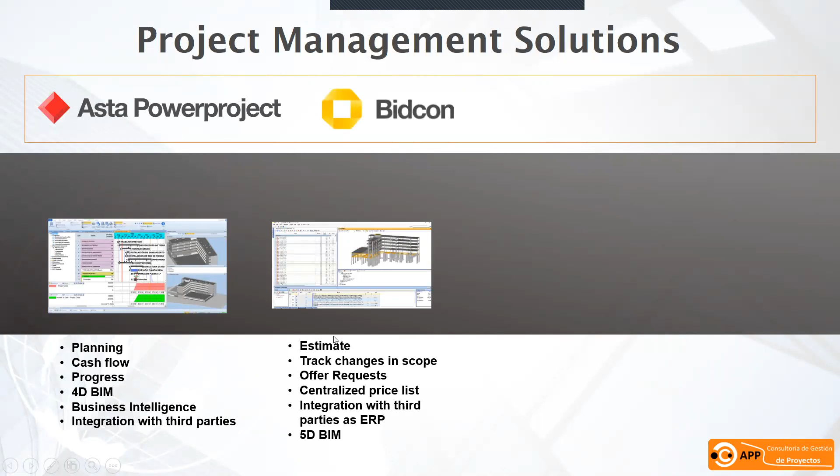Bidcon is mainly for 5D cost estimation. Tilos is a Trimble product for linear planning, and Ecodomus is for facility management, 6D and 7D.

So, the general idea about BIM. Some of us call it building information model, or modeling, or management. Generally speaking, BIM would take hours to talk about, so I would like to give the general idea in a quick way. 3D is a pure design model, so you will be able to see only the 3D model of your project. 4D, which we are going to focus on today, is the model plus time, which means that you are combining your Gantt chart with the model.

5D is the same, model and time, but also with the cost estimation. 6D is all of the above, the model, time, cost, plus sustainability. And 7D is for facility management, the whole life cycle strategy and as-built handover.

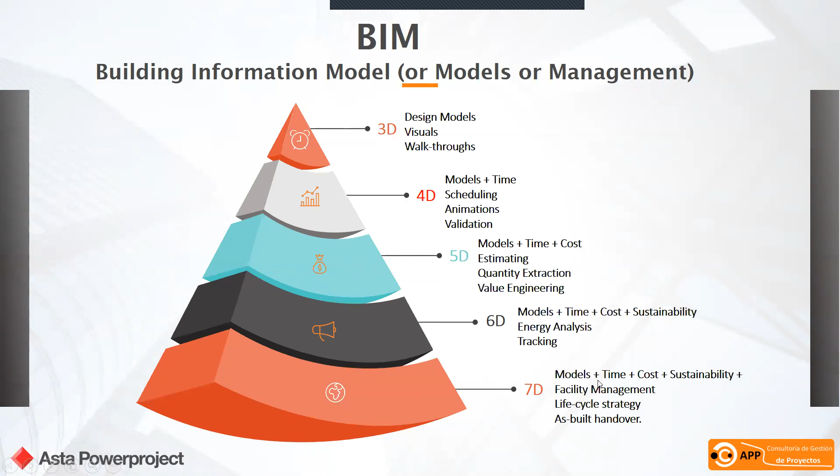So how can we actually produce the 4D BIM schedule? If you are using project management planning tools such as Primavera, MS Project or Asta Powerproject, you have your schedule, and you also have your 3D model, which can be produced by many other solutions on the market right now. Some of the famous ones are AutoCAD, Revit, and Bentley. Using the IFC format, you can combine the schedule with the model in Asta Powerproject. So Asta Powerproject plays a great role in combining your current schedule with your current model.

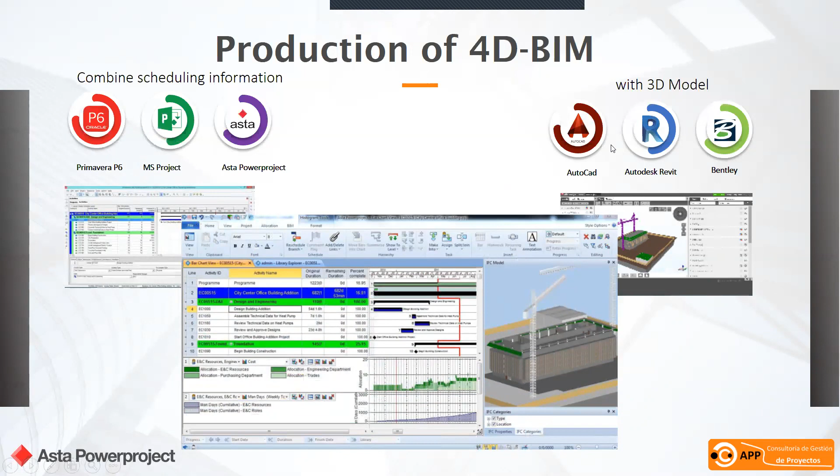Now, to recap, what is Asta and where does it come from? First of all, Asta has been on the market for more than 25 years now. It has been awarded four years in a row as the best project management planning product, and it's been used by 92% of the top UK construction companies. As far as I know, we have over 130,000 active users worldwide, and it is available in 10 languages. Some of the projects completed using Asta Powerproject include the London Eye in the UK, the Hong Kong Airport, Petronas Towers in Malaysia, the Warsaw Metro Line, and so on.

You may find some of the customers who are using Asta Powerproject. I will not be surprised if some of you are from these companies, but you might be in a different location. As a general explanation of the Asta Powerproject solution, first of all, it's a core scheduling tool. So you can have all the Gantt chart information and all the information regarding your tasks and so on. It's purely a scheduling tool. It has integration.

It has integrated modules or options such as the earned value analysis, the S-curves, the risk management, the line of balance. Previously, some years ago, it was an additional module, so you had to purchase it additionally. Right now, no need. It is integrated into the one Asta Powerproject. Business intelligence report as well.

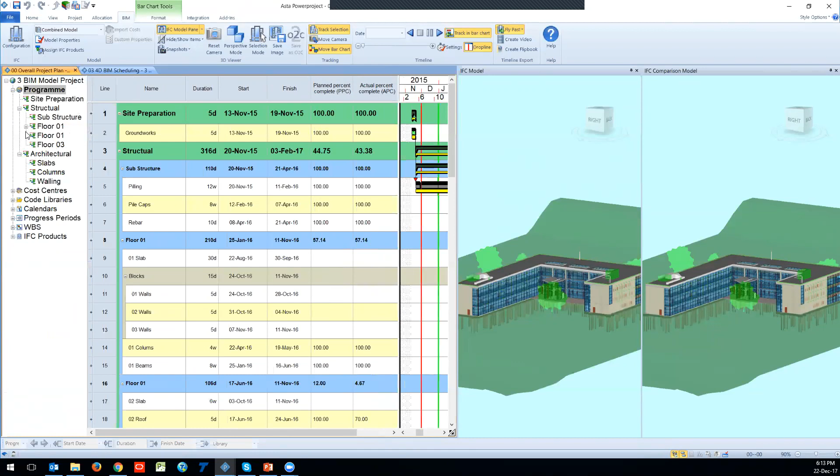We have our hierarchy, our project. This is a 3D model project. You can see the WBS structure on the left side. The spreadsheet information, so you have the spreadsheet with the standard columns. You can add any other columns. The Gantt chart. It's colorful, pretty well understandable, and you can change it.

These lines, which you can see with a different color, are our progress periods, which means my project has some progress information. So in Asta, you are able to have multiple progress periods in order to record your progress. At the end of each month, I have one progress period, and according to this, I have added the progress. Below the yellow line is my baseline information, okay?

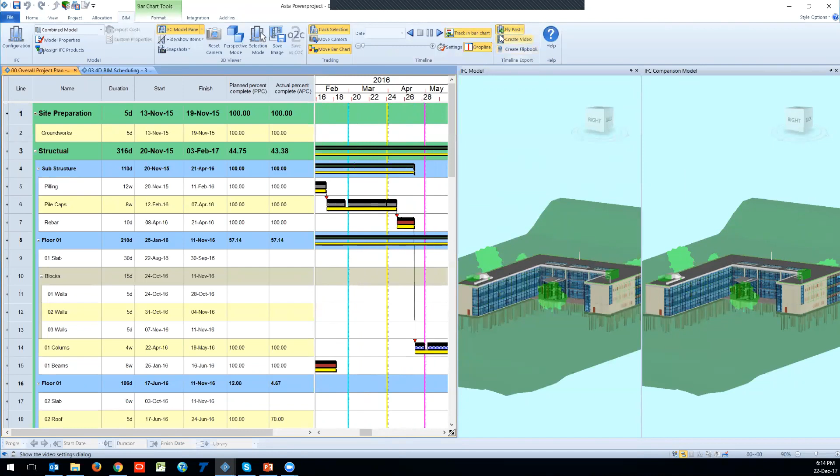So now on the right side, we have our model itself and the comparison model. As I have my baseline, I'm able to compare my baseline information with my model itself. So in general, when you run the simulation, you will see this view. This is my project result, so I have my standard Gantt and I have my model.

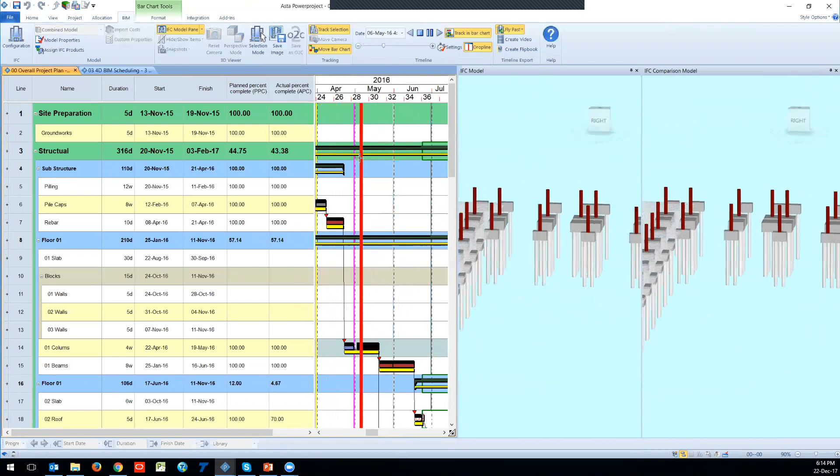And I have already entered my progress, and I have the comparison model in order to track my delays. So the next step, what I'm going to show is how to make this kind of plan, how we actually do it in Asta Powerproject. So I'll pause it and go to the initial stage.

When you first open Asta Powerproject, you will see this view where you have the Gantt chart, the spreadsheet, and your hierarchy. Well, first of all, let's bring in our model and see how we can create the scheduling directly from the model.

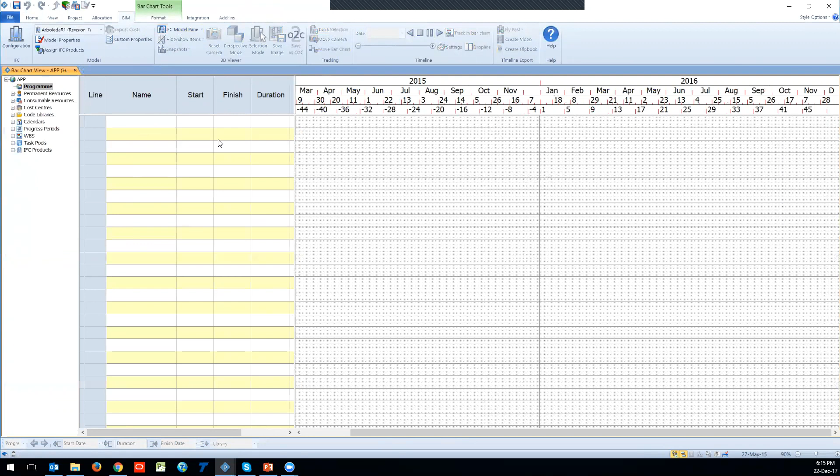There is an ability to import the model, so you can import it from your local drive or from the server, if you have access, or using the free Eleco BIM Cloud option. The BIM Cloud option is very useful in order to share your IFC files, so you can have the IFC files with different revisions.

If we're speaking about revisions, for example I have already imported one model and I have the revision. So from here I can select whether it is the latest revision or which revision, and I can give the name of it whenever I'm adding a new one. So I will open this model.

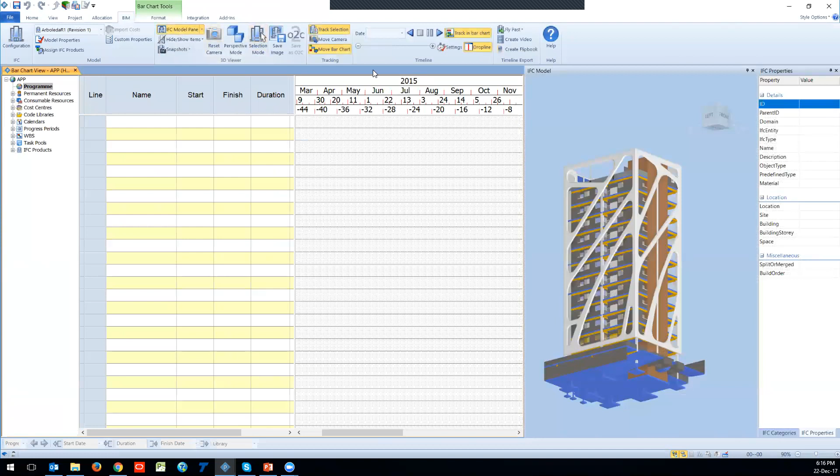As you can see, I have here one model. I'll just make it more visible. This is the hotel project, the sample hotel project. So what can we do with this model?

First of all, I have to say that Asta is not a design solution. It is a project planning solution with integration of the 3D model, which means I cannot move the objects, I cannot change the quantity, I cannot change anything in this model. However, I am able to do some minimal changes like the visual effect, such as changing the color of the objects. This is the minimal thing you can do in this case.

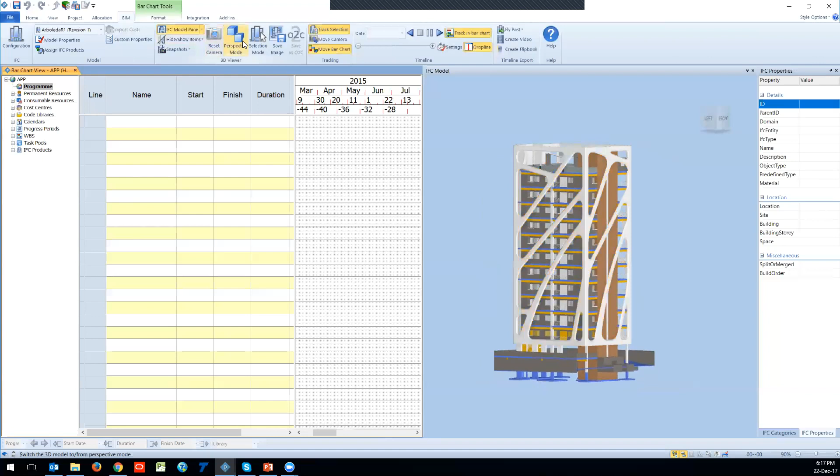Now what else can we do here? We have an option such as perspective mode, so you can go inside the building and have a walkthrough.

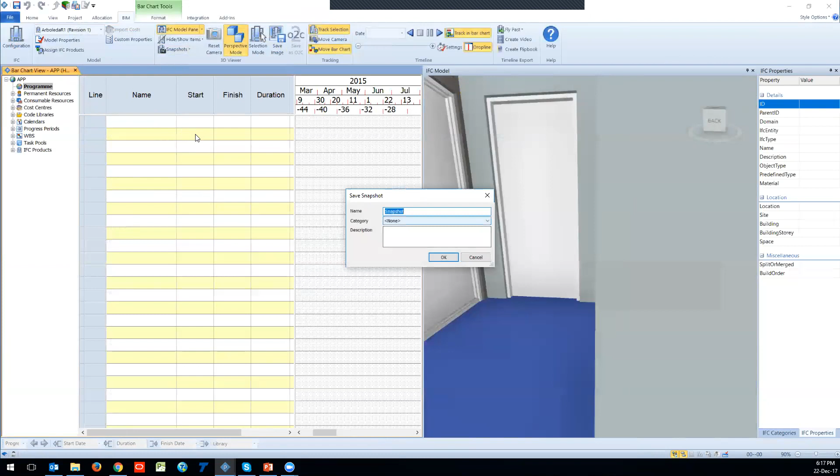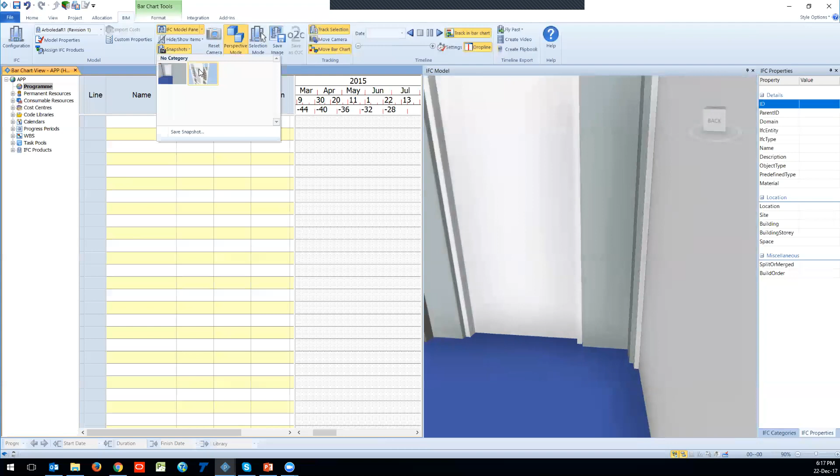You can also save snapshots. I will save one snapshot, let's say interior. I'll save this one, then go back and save another one - this is my exterior. So whenever I need to go back to this one, I can just select that particular snapshot and continue working on it. This is the perspective mode.

Another thing is I'm able to share the picture if I would like to send a picture of my 3D model, so I can save the picture in JPEG or any other different formats. No problem, you can save it and share with anybody.

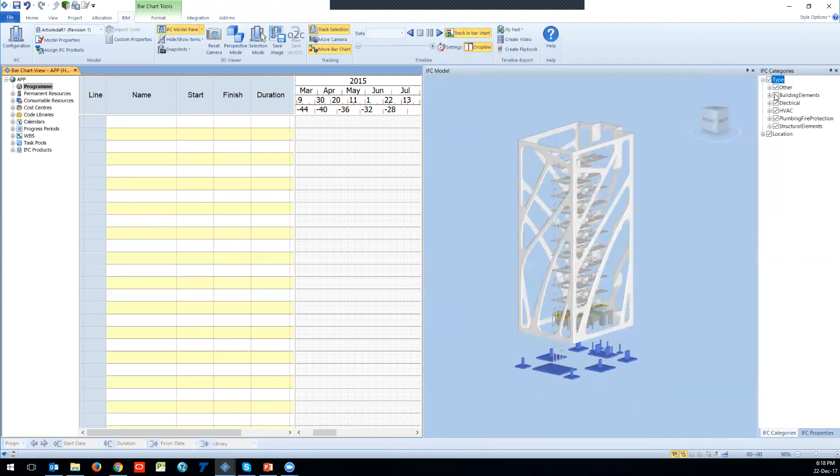Now let's go into more details, such as the properties and the categories. Once we import our model, we will see information such as IFC category. We have different types of categories, so you can switch them on or off in order for better planning and controlling.

You have different parts of the location, so I'm just switching some of the parts of the location, for example. All of this is possible to do in Asta Powerproject. So this is IFC categories and so on.

Now if I select one object - right now I have selected the skin - and go to the properties, I'll make it more visible. Here we have information coming from the model itself. We have the ID, the parent ID, if not it will be empty. The important information is the IFC entity, which is already given in the model.

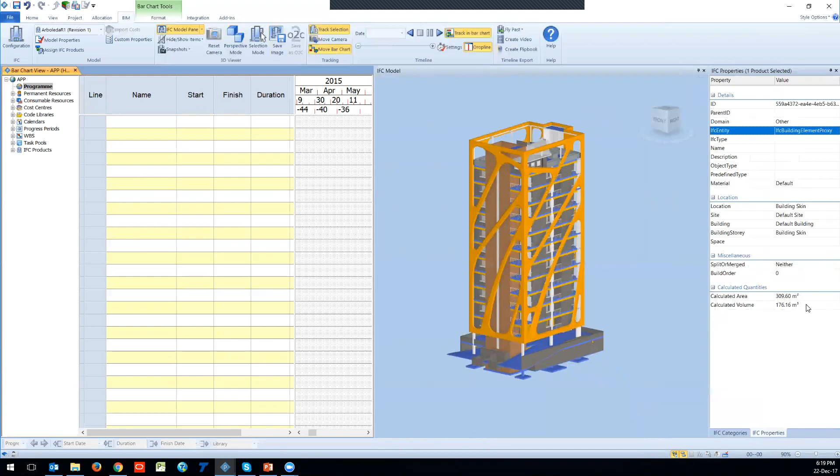The material used can be loaded and shown, however it depends how much you have loaded into your model previously. An important part is the quantities - you have the calculated area in square meters and the volume in cubic meters. So when you select an object, you get information about the calculated volume, area, width, length, and height of the object. In my case it's a wall, plus gross side areas. All this information is visible here.

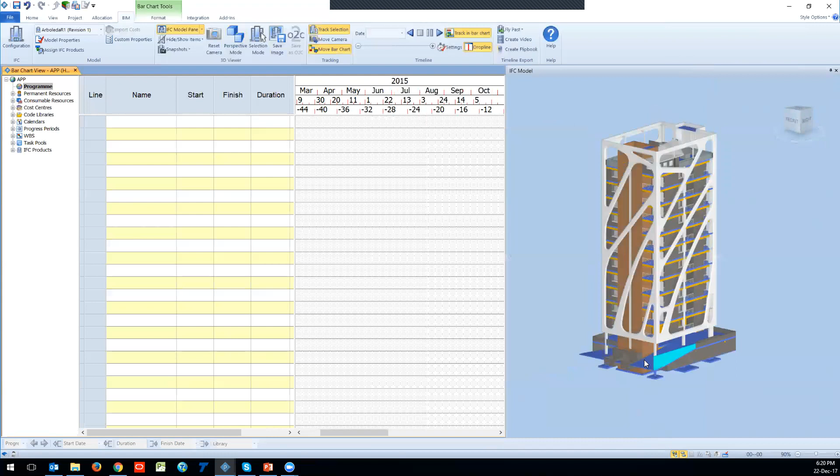Now, how can we create a schedule from this model? I will go and select my footings - so I have here my footings. There are multiple ways in order to create the schedule.

First of all, you can create directly on the Gantt chart - multiple tasks - and give the names. Then I'm selecting my selection mode and then select objects, and just easily drag and drop it onto the model. So now I have assigned 3 or 4 elements to this task.

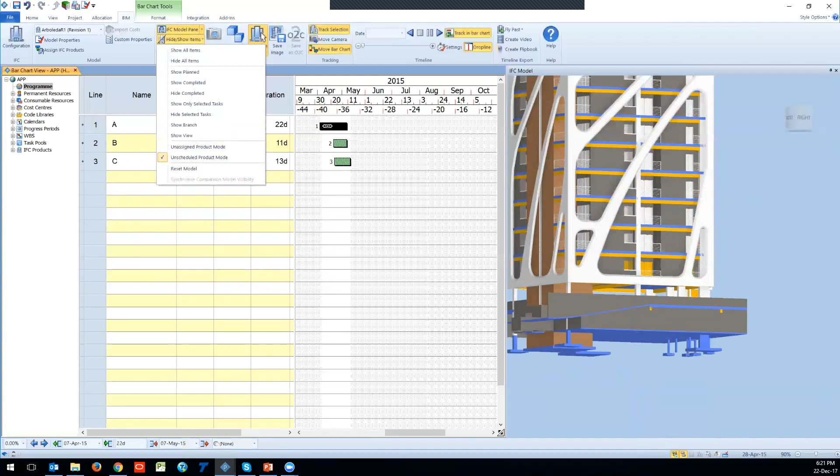So how can we actually benefit from this? Well, I can select the unscheduled mode option. It will show me the items which are not scheduled.

Let me show you once again. For example, I'm selecting this footing and this one, and I'm adding them to the task. Now it has disappeared. I can select multiple items, drag and drop, and they will disappear.

So this way it will eliminate planning mistakes. You will know which items have been planned and which items have not been planned.

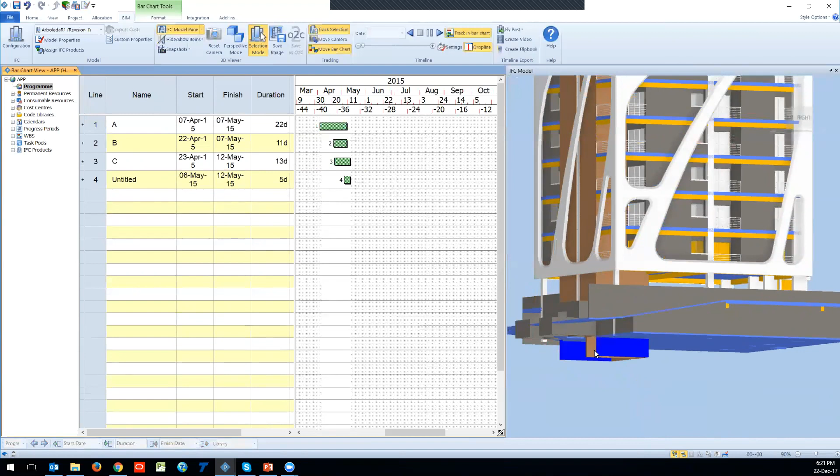I can select some of them and, without creating the activity first, directly drop them onto the Gantt chart, and it will create a task. I'll select a few more and drop them, and so on. So this is one way we can create tasks.

I'm going to delete this one, and you can see it's coming back.

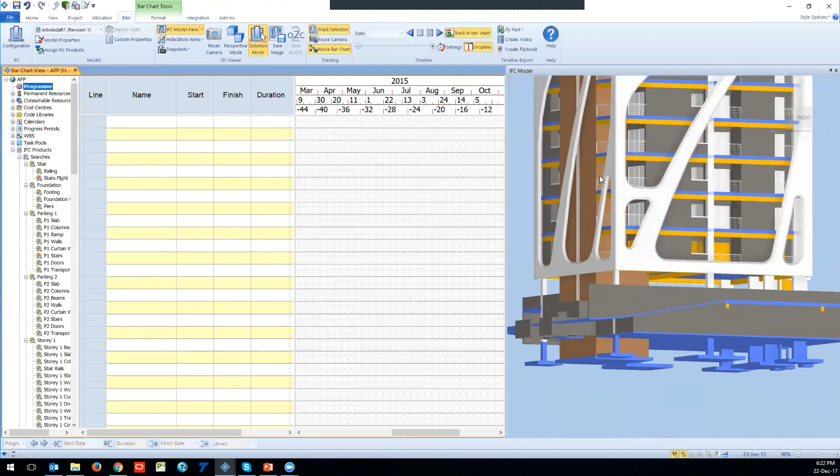Another thing is using searches. Searches are a kind of automation. I know you might have a lot of activities and a lot of elements in your project, so you can use searches. It's kind of automation for mapping your tasks with your model.

For example, I already have some searches created. I'm going to open the properties bar and explain how it works. We have the details information, so you can give the search a name. Now there is a criteria - in order to use searches in Asta Powerproject, you have to give the criteria.

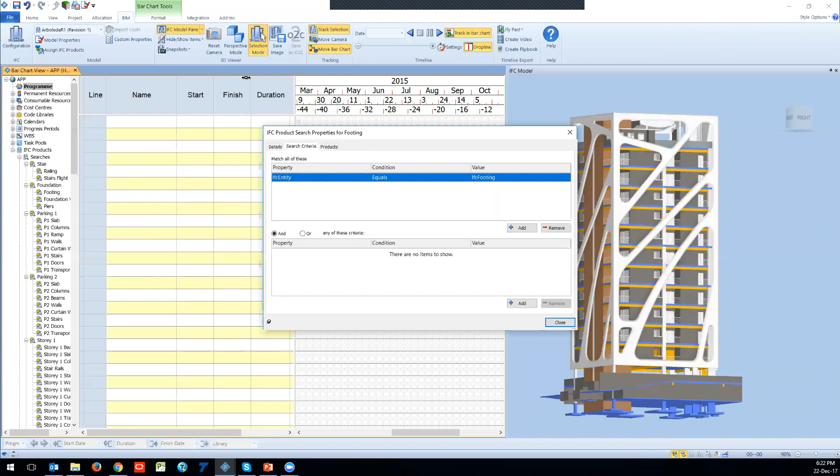For example, I'm using the property IfcEntity. If I open the properties pane right here and select, for example, the footing, I have the IFC entity, say IFC footing. So I'm taking the property IFC entity equals, giving the condition value IFC footing. Once you create this criteria, it will show you all the products you have in the model.

You can easily select them all. So I just select them and drop it into your Gantt. Right now, as you can see, it has disappeared.

I have it here, so I can also show them all. Whenever I select my task, you'll be able to see which item in your model has been selected.

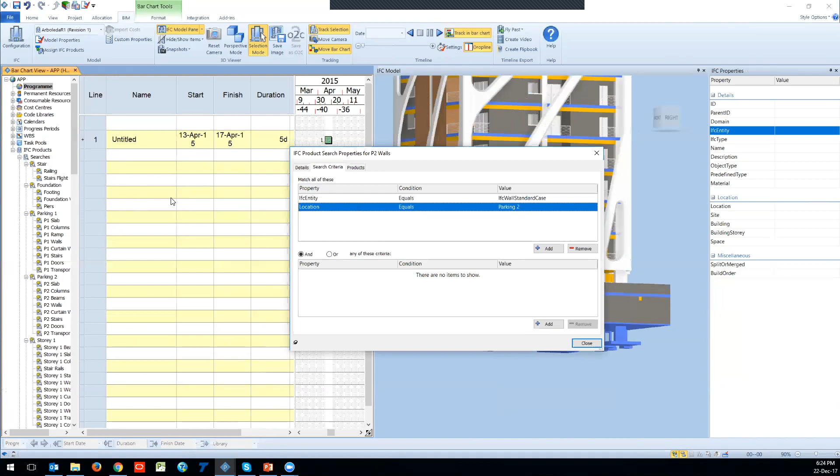For example, you can have multiple criteria. If I take the properties of the Parking 2, I have two searching criteria - first by the IFC entity, second by the location.

So I have my location, which equals - this is the wall. I'm looking for the wall, and I'm looking at which location it is - Parking 2. So if I select it, it selects my tasks.

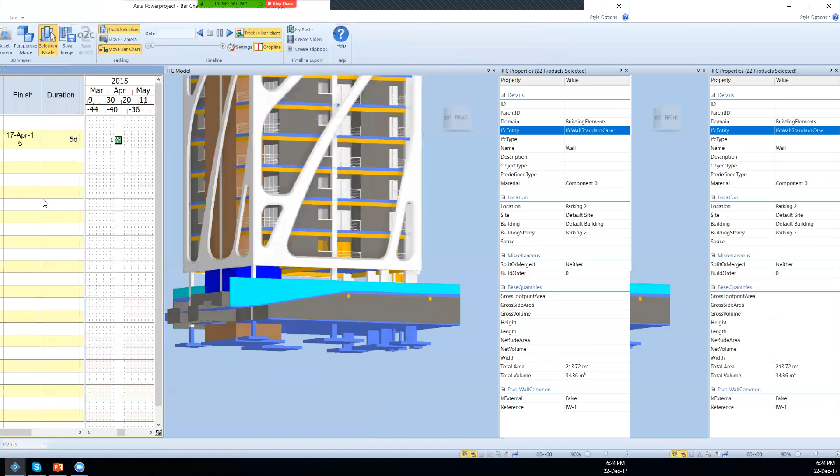Now once you've created it, you can easily create your task directly from your IFC search - no need to select from here and drag and drop. You can just create your task, and it appears over here as a foundation wall.

If, for instance, I would like to create a task for parking one slab, I can just create the task and I have my parking one slab.

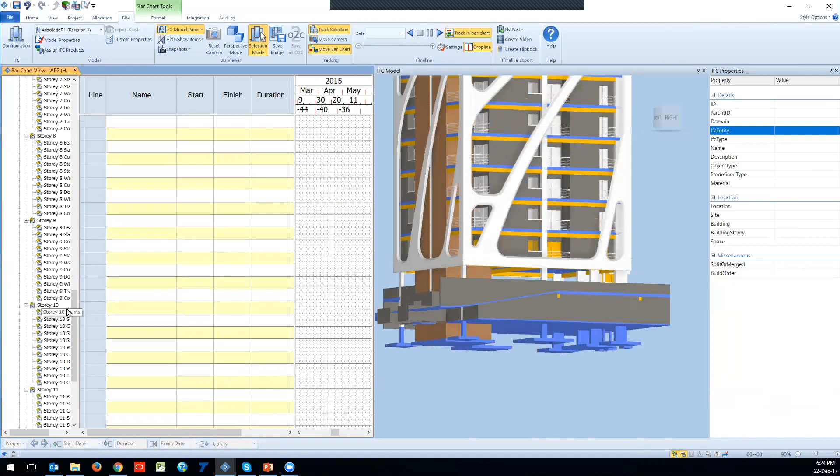Or once you have all the searches done, you can just select all of them and create your task. Now it's creating all the tasks which are assigned to my model.

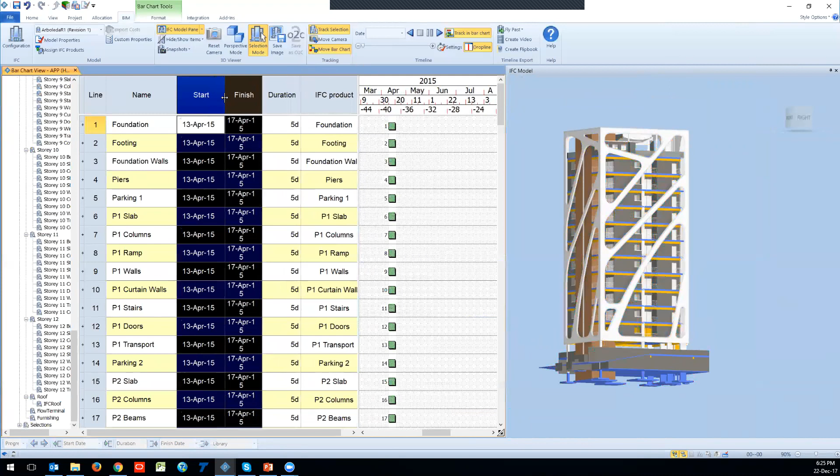Okay, it's done, so I'll make it more visible. Now, once I have it on my column as well, I know I have assigned my product in the column-based - this is the IFC product. It means it's showing which product you've assigned in your task as well as in your columns.

Once we've done this, what we can do is easily link it. So I'll select them all, link it as finish to start, and then reschedule it.

Now I have rescheduled. It takes the standard template default information regarding the creating activity. When you are creating the activity, it comes with 5 days. However, you can change it anytime, no problem with it.

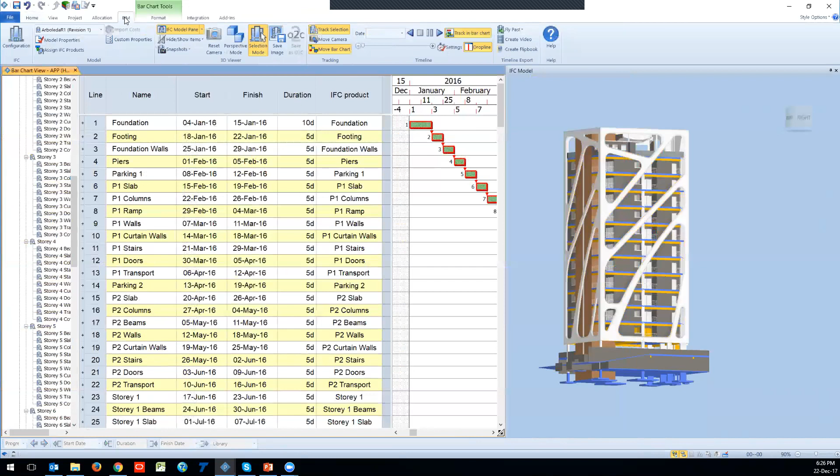Reschedule again. Okay, once we created this one, I can run my 4D timeline in order to check whether everything is correct, whether my timeline is going well, if I have any planning mistakes or not. So by this way you can visualize your plan in Asta Powerproject.

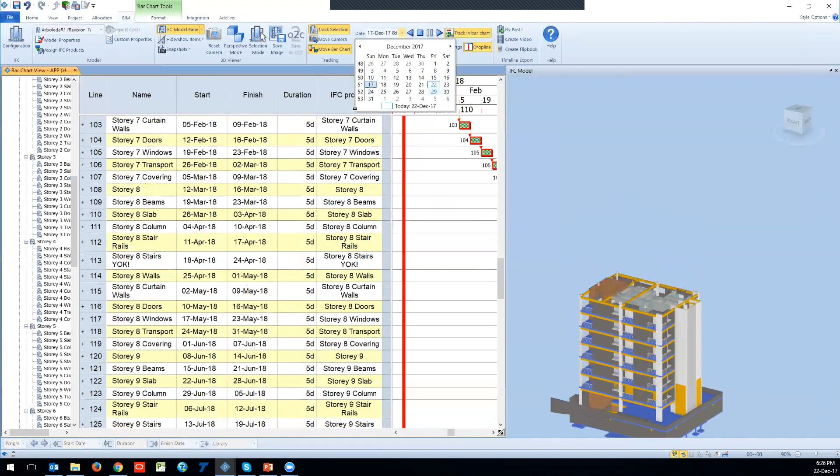So while it's going, the timeline options can provide you the information that you are able to track according to the date, or you would like, for example, to see the weekly progress. You can change it to see what will be my estimation, so you can change your dates in order to see in exact date and time which activity is going to be performed and track it on the model itself.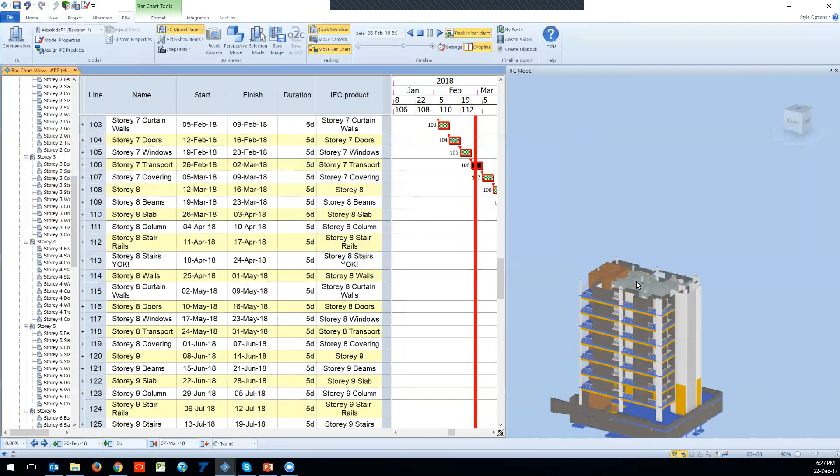Great, now I will stop this one. I'm going to show why we call Powerproject for controlling as well, not only just scheduling but for controlling as well. I'll show in a different example how we can do this, but just to make my schedule more or less better view.

So for example, I don't have here my WBS structure. So what I can do is just change this task to my summary task, and I know that the 3 tasks - footing, foundation walls, piers - go under my foundation. So right now, I have my foundation as my WBS.

So it works in a different way than the other solutions. You can create your work breakdown structure anytime. So in the hierarchy, my foundation task appears.

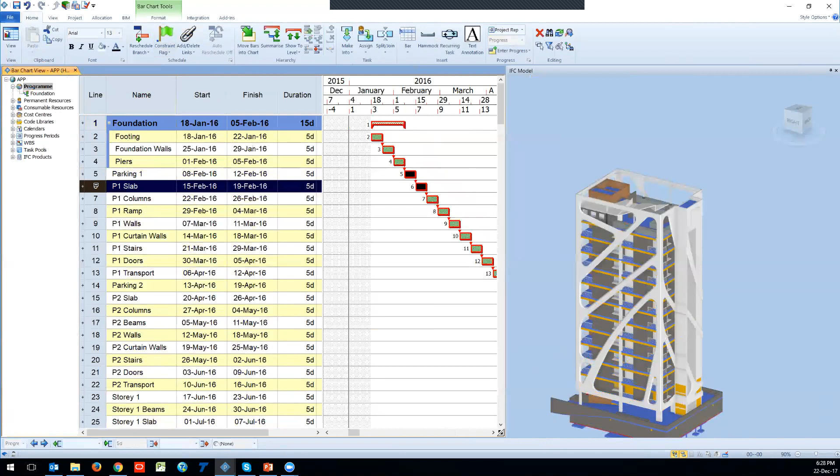The same way, for example, I have my parking one. I would like to make this one as a summary, or I can just select some number of the tasks. As you can see in my 3D model, it's also been selected. I can just summarize it. I can say this is the parking one.

I can remove this task because I don't need it. Now, I don't have any relation. In this case, I can do the relation - just finish to start - or the Powerproject allows making the relation between the WBS.

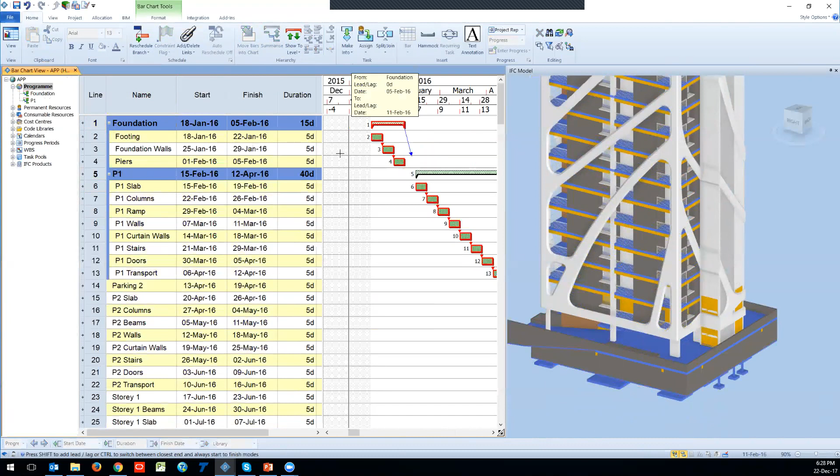So as you can see, I'm going to link my tasks between 2 WBS. By this way, you'll be able to see in this case it is appearing in the hierarchy. You can work on it.

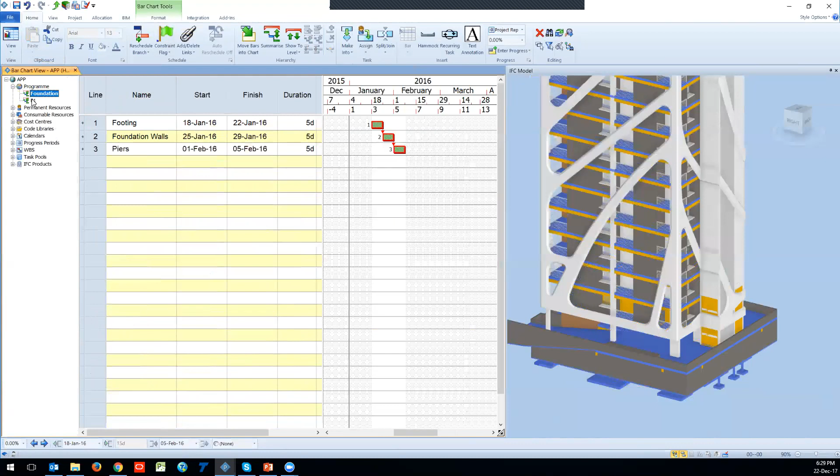For example, if you already have the hierarchy of your project, once you open it or import it in Asta Powerproject, you'll have the same hierarchy. And once your model is linked with your task, you can see only the view.

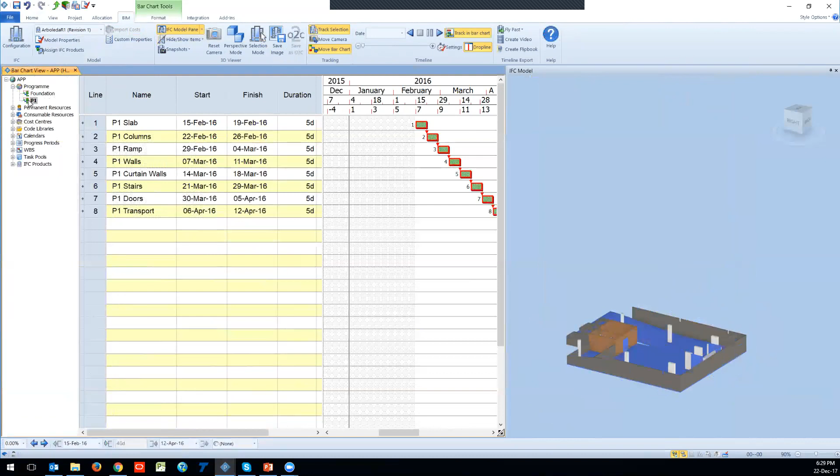For example, you are right now working with the parking one WBS, so you can see only the elements which are in the parking one. Great, so I'm going to show all.

And now another topic that I wanted to mention is how we can bring our current schedule. If we have our current schedule, how we can bring it. Well, we can simply open the project. So let me get to the project.

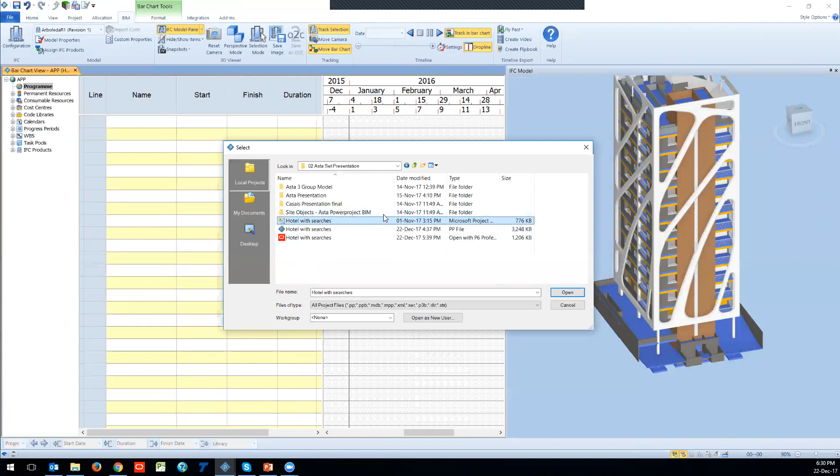Okay, so I'm going to open. I have here the Excel file or the MS project file. So first, let me open the MS project file. You don't need to do any additional effort for this - you are just opening the Microsoft project document.

So once you open it, it says that I would like to import using the template. And now I have my Microsoft project, the same way like I had in the Microsoft project.

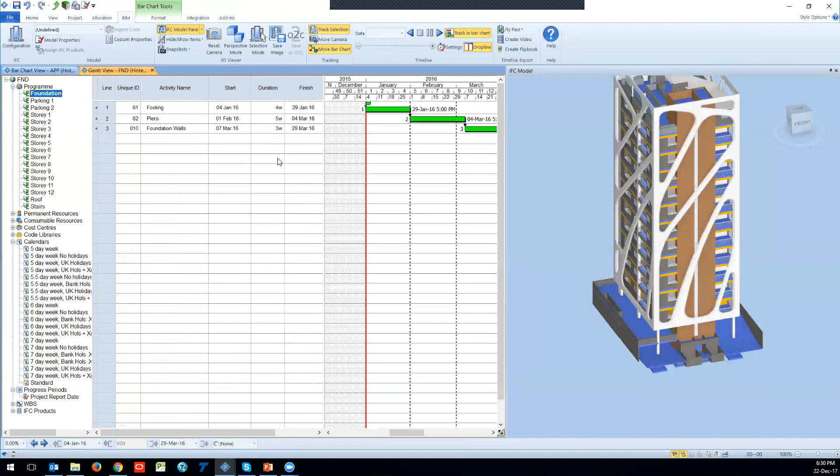So in this way, how I can do the linking, as I was explaining, you are going to the selection mode, selecting a particular activity, let's say in this way, and just drag and dropping and adding to your schedule. Okay, this is the way, or as I said, you can create the searches, which is kind of an automatic way.

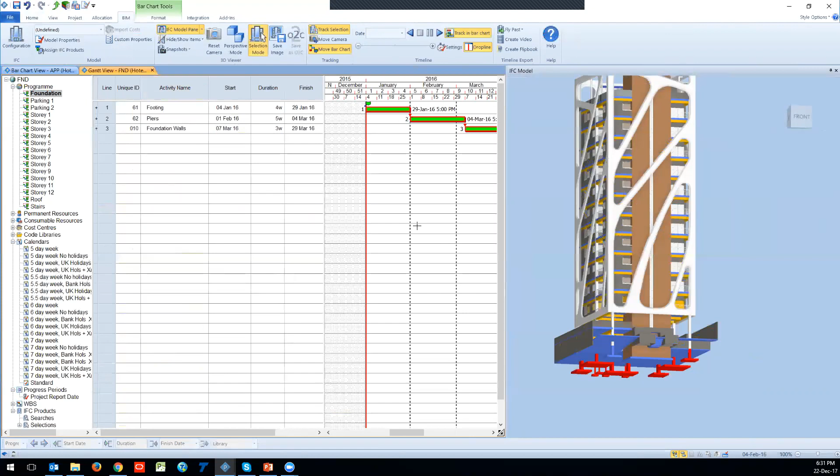Let me open another one, which is the XER file. So this is a Primavera XER file. The same way I'm going to use, for example, the Primavera template, which is already inbuilt. And you can see I have the same project, but which was in Primavera, right now in Asta Powerproject.

So in the same way, you can use the searches or the IFC drag and drop file selection in order to link your project and the model together.

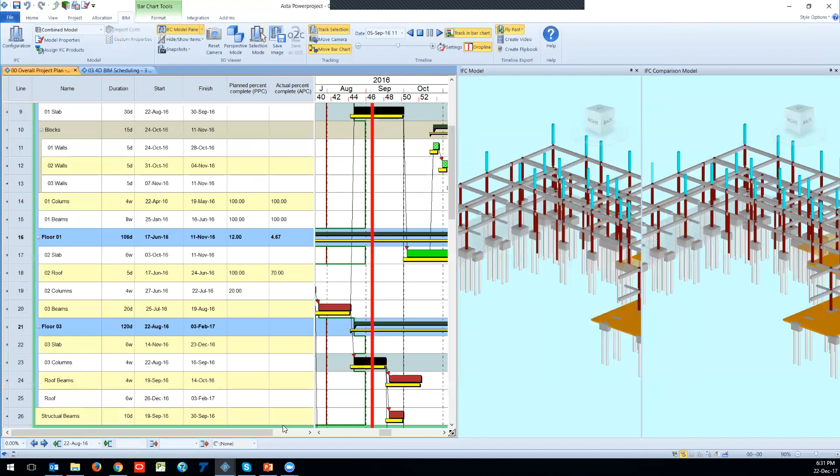Okay, now I'm going back to the university model. So once we have created, updated, or entered our progress, what we can do, or before entering the progress, let's go through the views. Asta Powerproject allows you to have multiple views. So what is a view? It's actually a saved set of columns which you would like to see. For example, I have here multiple views, like the overall plan.

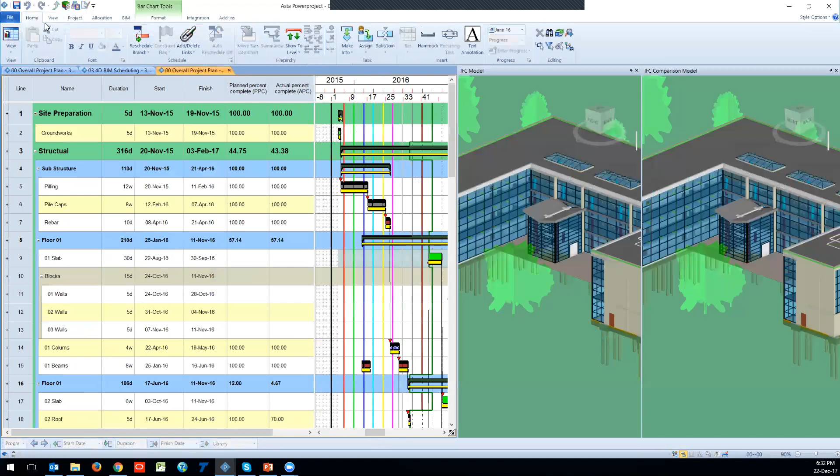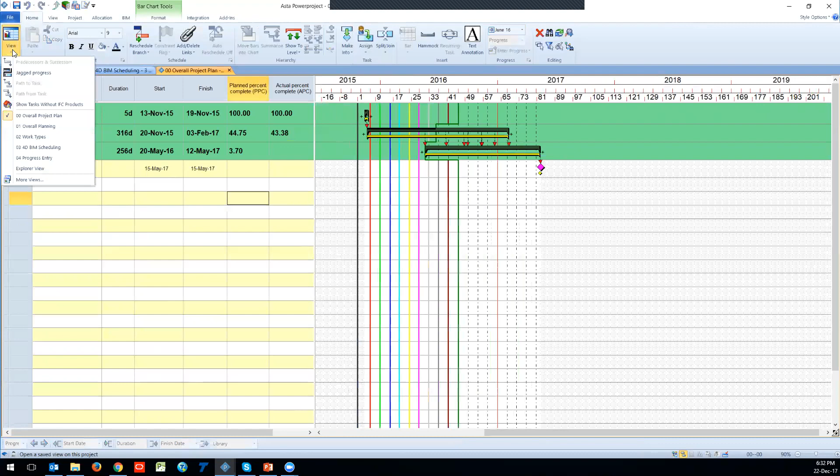If I'm going to see the overall plan, I'll have information such as the main information, the planned percent complete and the actual percent complete. I don't need to see, for example, the model view, so I can remove it. The other view is the overall planning. The overall planning view is where you are able to input your quantity to set up the work rate, the unit time, and as well, when you are adding the progress, you will have the actual work rate and the work rate remaining.

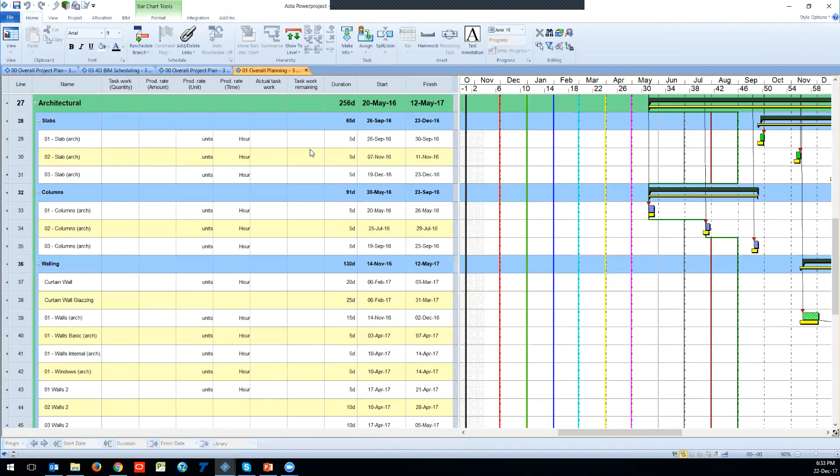So how can we do it in this case? Once we have the model, I'm going to show only the model itself. I will add here the columns. By the way, you are able to add as many columns as you want, like information about earned value, constraints, cost and income information, resources, allocations, and as well the IFC. So I'm going to add here the IFC volume.

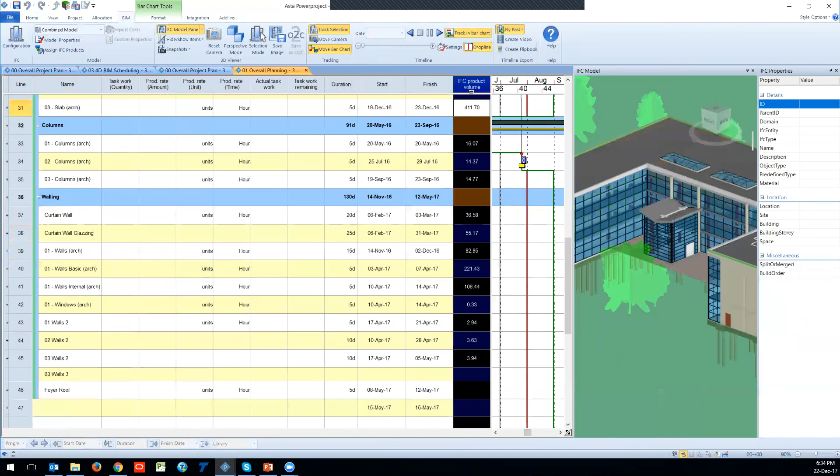IFC volume is the same as what I was explaining from the properties bar. From the properties bar, we have here IFC volume and IFC area. So when I select, you have the IFC volume of the particular element. In this case, it is the roof, part of the roof, and I know that it is 76 cubic meters. So, for example, I would like to use this quantity information in order to plan my work.

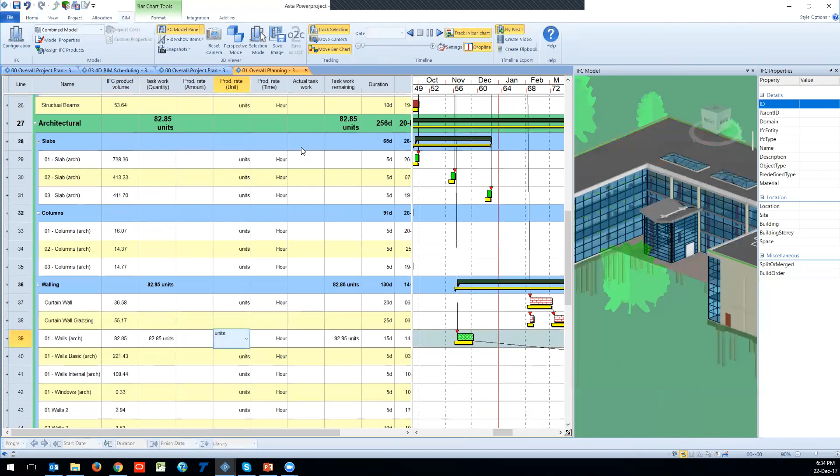So I have this task, which is the wall, and I have my information about the quantity. I can easily copy and paste it to my quantity. In this case, it's a unit, but if I add here the unit as cubic meters or square meters, I can change this one to cubic meters. It automatically changes, and I can give the estimated work rate based on hourly, daily, or weekly. It's up to you.

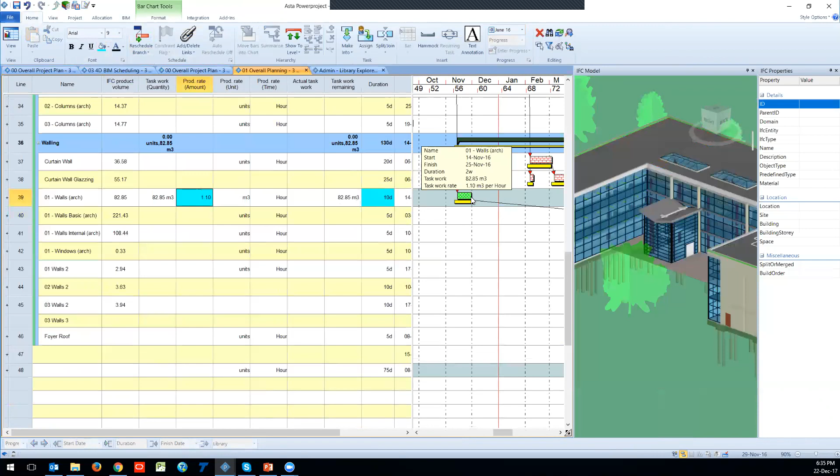So I'll say this is 10 hourly, and the duration of my task automatically changes. As you can see, I will change my work rate. Right now I have 1.10 cubic meters per hour, but if I change it to 20, my duration is changing. Of course, I have hours; I should have taken a longer activity. If I change the activity duration directly on the Gantt, it will change my work rate. So this way, you can get all the quantities from the model as IFC product volume into the quantity, give the production rate, and you will have your estimated duration.

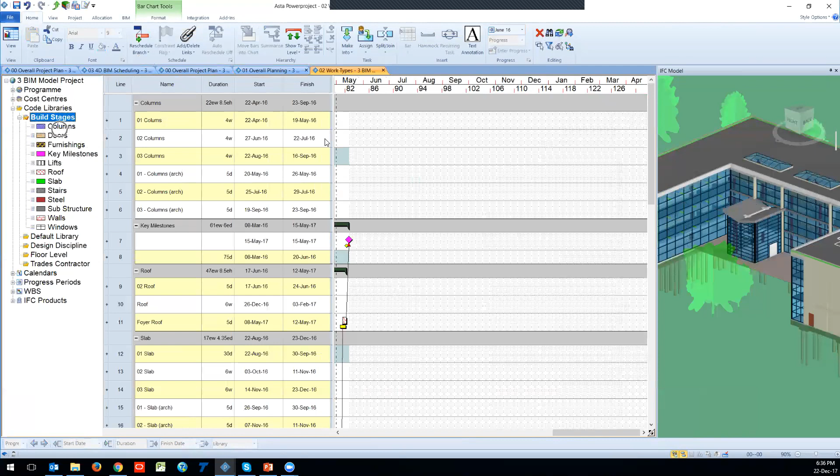Okay, great. Let me go back to the views. Once we have our overall planning, we have the work types. What are work types? In Asta Powerproject there is something like a code library. You can create your own libraries in order to monitor which floor level you are working on or the building stage. In my case, I have divided it into columns, doors, furnishing, key milestones, and so on. They are very visual in our Gantt chart, so I'm able to see all the information according to my code library. For example, all the roofs, I can see when my activities are, and so on.

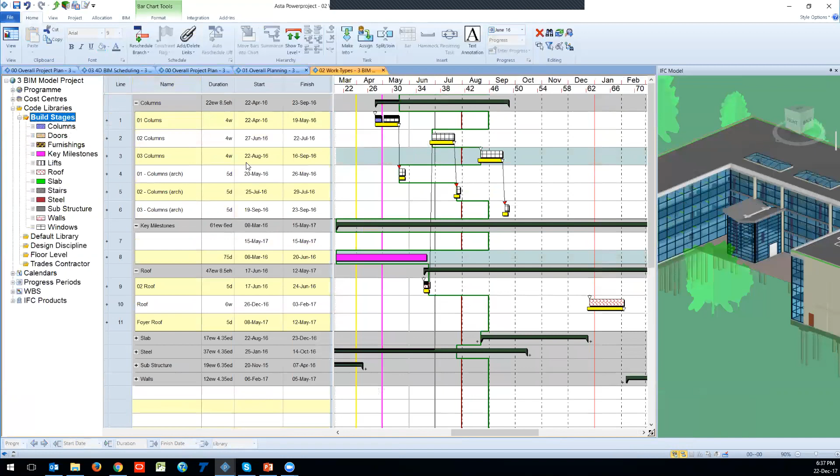This can be applied to your subcontractors. If you are using different subcontractors, you can assign the walls. For example, I would like to assign to this task, well, it will not be logical, but let me take the window. So whenever I change it, you'll be able to see it. Now, another important view is for BIM scheduling.

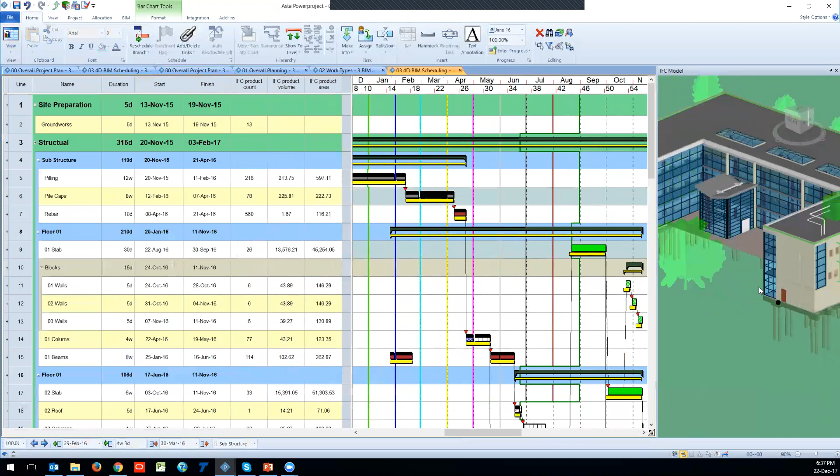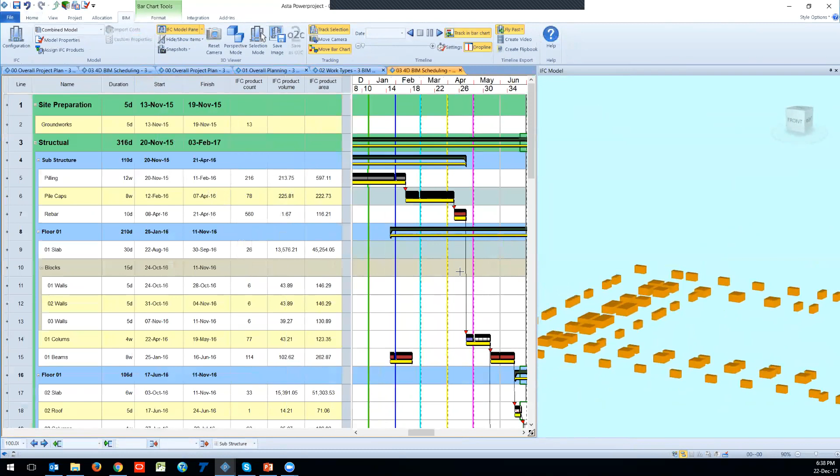It is the same as I was explaining. You have the information about the product, IFC product area, the volume, and the count. For example, if I select the task and I would like to see this task on my model, I can just show only the selected task. So I have my pile caps, and I know that I have 78 pile caps in this project. So this is the way you can work.

For example, I can also see by the structure, like the structural view, and show only the view, so I am able to see the structural view only. Okay, so going back to our views, there is a progress entry. As I mentioned, you are able to add the progress by different progress periods. You don't need to have only one progress period all the time. You can save your project as a baseline and then add different progress periods.

In my case, I have added several progress periods monthly, and each progress period gives a different color so you can easily analyze when the progress has been made. By the way, you can use Site Progress mobile. I have here Site Progress, where you are able to send your project or part of your project, some tasks, to the site engineer, and he will be able to update it using the mobile phone or the tablet.

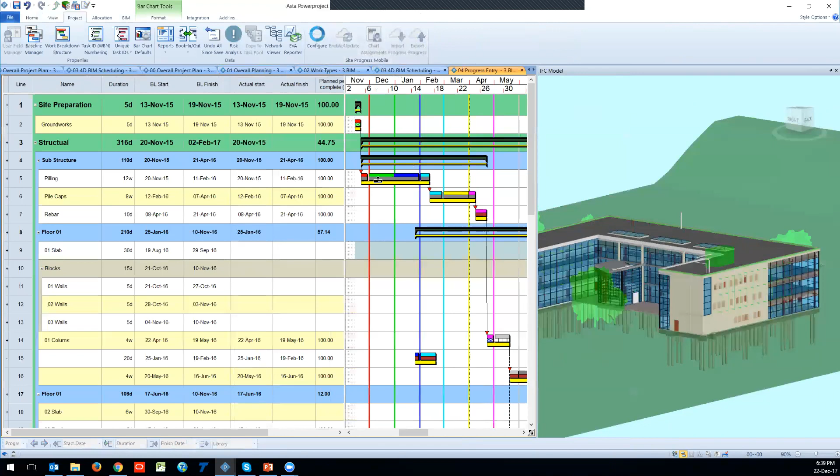This way, he sends it back to you with the progress information, and it will appear right over here. So you will have the baseline information, the actual start, the planned percent complete, and the percent complete as well. Okay, going back to the overall view and going back to the BIM part.

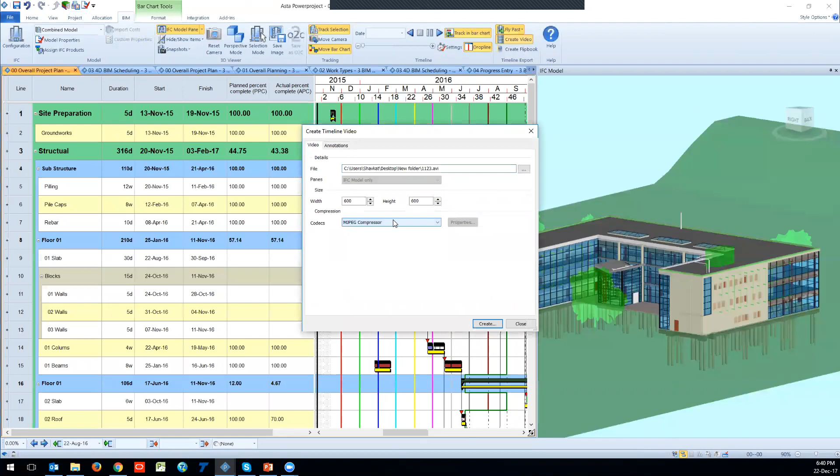There are functionalities such as creating video, so I'm able to create the video. I can add annotations like the task data, the week number, the information. I can set the widths and select codecs in order to create the video, I mean the simulation of it. I can create different fly paths. The fly path is actually the way you would like to see your project. If I select none and then run the project, it will be stable.

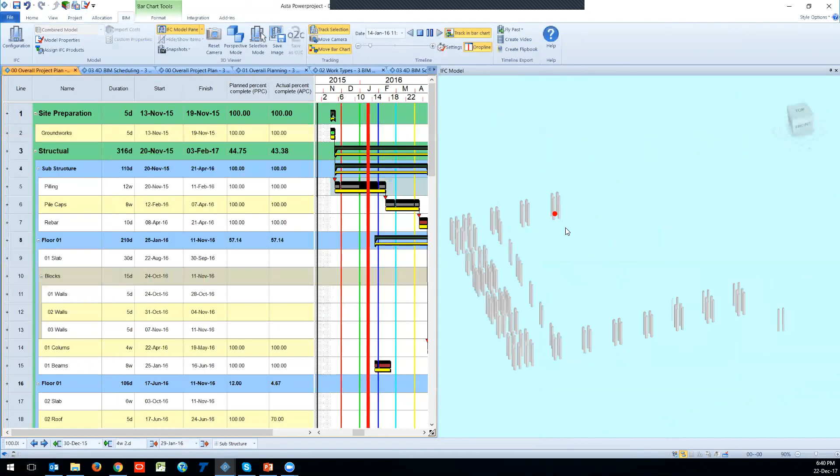However you would like to see it, you'll have the initial position of the camera. However, when you are using the fly past, it moves the camera according to your wish. It can be mapped to the task or to a particular date, moving to the other side. You can create a number of flipbooks.

What is a flipbook? A flipbook is, in other words, a pictorial demonstration. You can have a number of pictures. I can just create it and show you what I mean. The flipbook generates a number of pictures according to my simulation. Okay, it's generating right now. I'm going to open it.

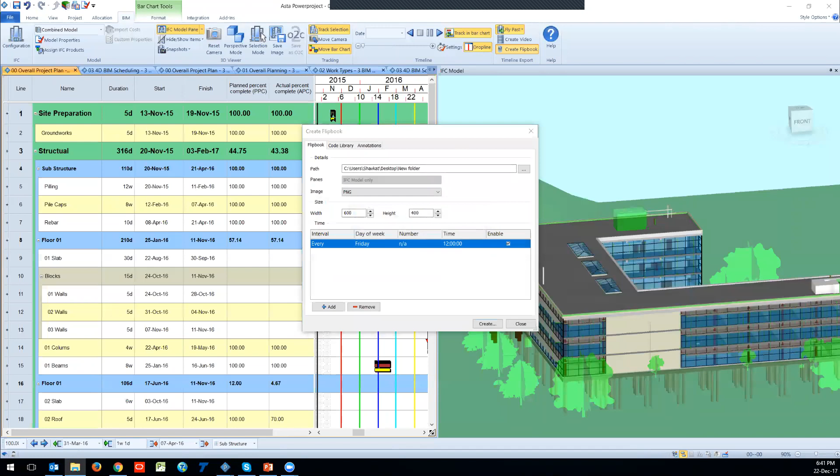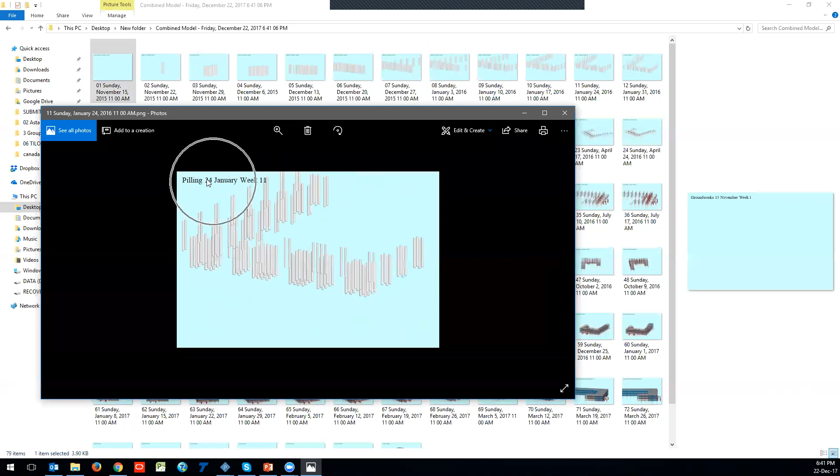Here I have my model, and I can see that each week I have some information about its status. If I open it and just move through it quickly, you'll have the information about the task, the current date, and so on. So this is the pictorial representation of the simulation. You might use this for reporting purposes.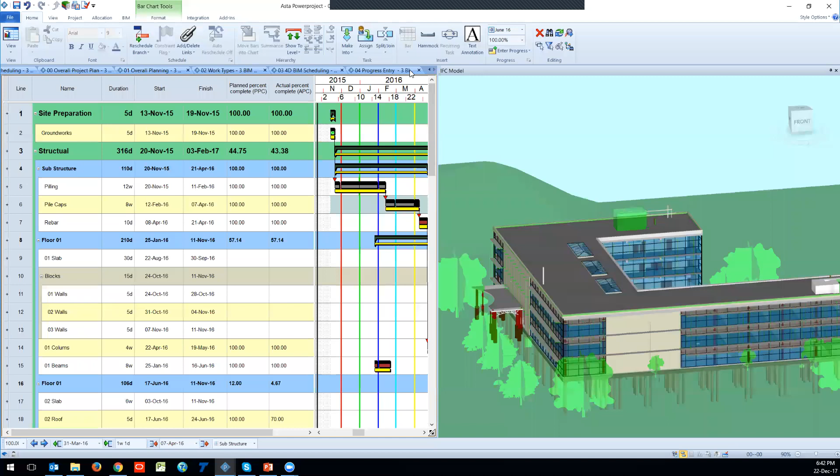Moreover, for reporting purposes, you can print whatever you see, the Gantt together with your time schedule and your model. If I just move it somewhere over here and then print it, you will see the same as whatever I see, with the legend information as well. So you will have the legend. These reports are customizable. You can put your logo, you can put the revision number.

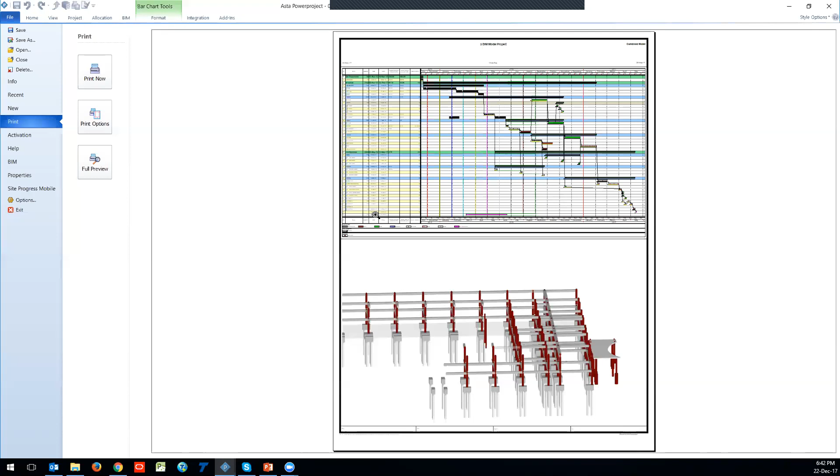It's completely customizable, whether you would like to put the Gantt on the right side and the model on the left side. It's up to you. So we have the printing option, and all we need is to select a different view. Nope, not this one. For the scaling, I can select A2. Okay. Oh, it's going to print. So what I mean is this. This is how you can print it.

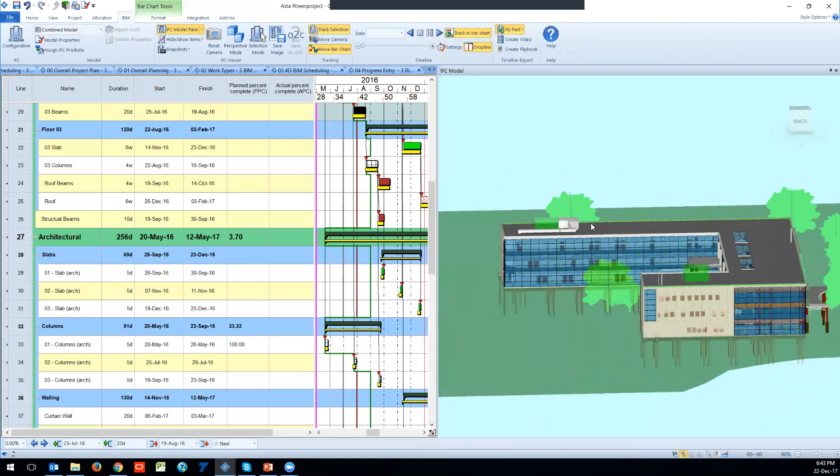Now, let me go back and continue what I was speaking about, the progress information. Once you have your baseline and the progress information, you can show it visually in Asta Powerproject in the IFC model view. Therefore, we are using the comparison model. So we have the comparison model, which uses my baseline dates with the live project differences highlighted. I can select the number of the baselines. If you have some different baselines, you can use a different baseline.

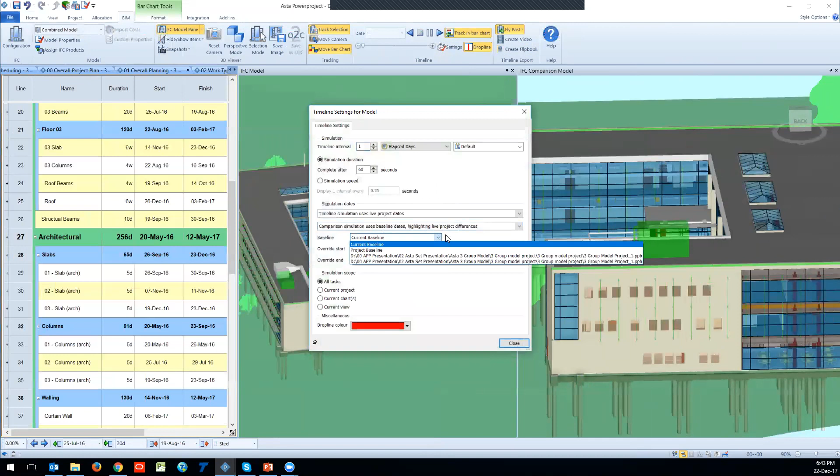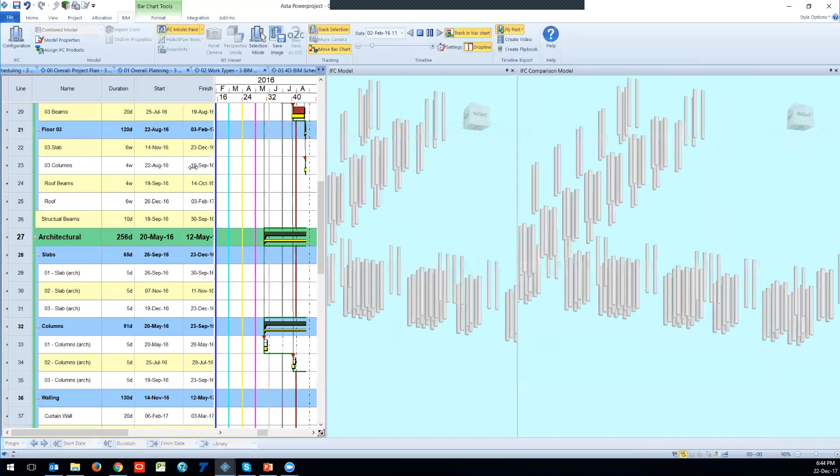Okay, and I can run my simulation, where you will see the information about the current progress. Now it comes. Everything is okay right now. I'm going right on time, but here I have some delays. So once we reach it, you will see the highlighted red part. Okay, where is it? Yes, let me try to pause it. Just a bit back. Okay, sorry. So the highlighted red part means that my activity is on delay. So it can highlight the activities which are on delay.

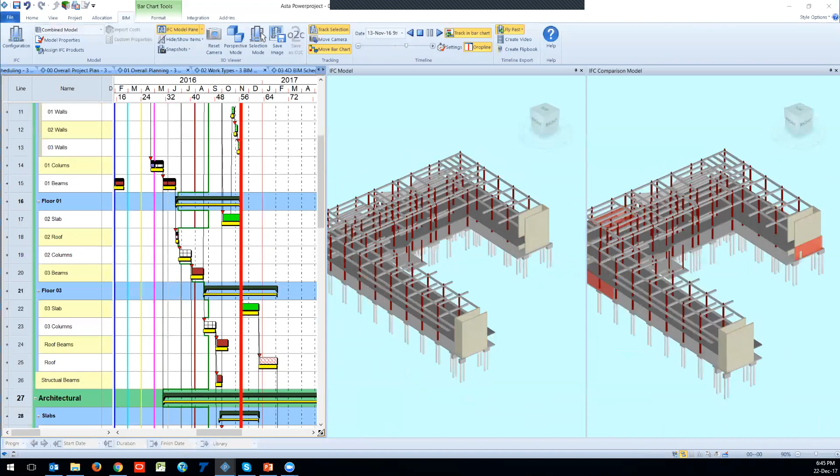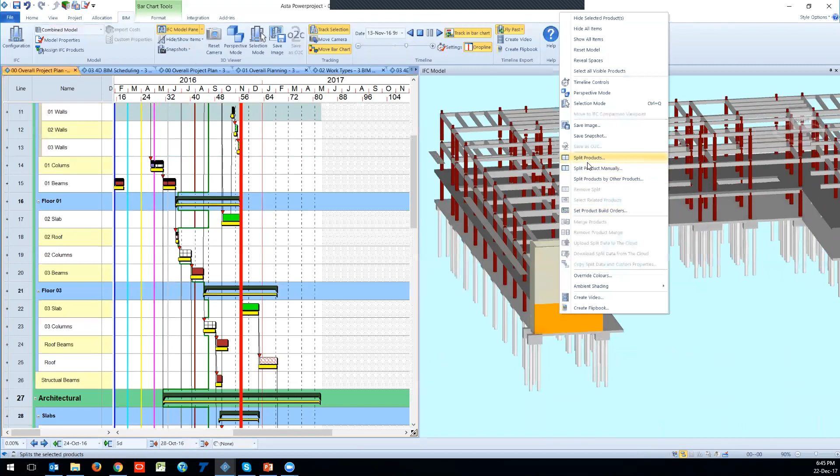Okay, we have received one question. It's a very good question, which I should have mentioned before: is there a possibility to set the building order or to split the object in Asta Powerproject? Yes, there is a possibility to split and set up the building order. For example, if I select this task with the right click, I can split the products. So I can split the products in three ways. You can split just by the directions, if I have some different directions. The X way, I can preview how it is split. So I'll say okay. Now my task has been split.

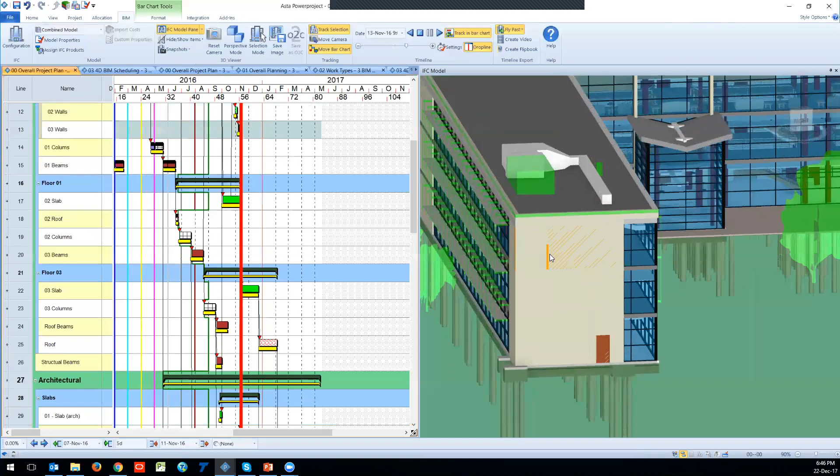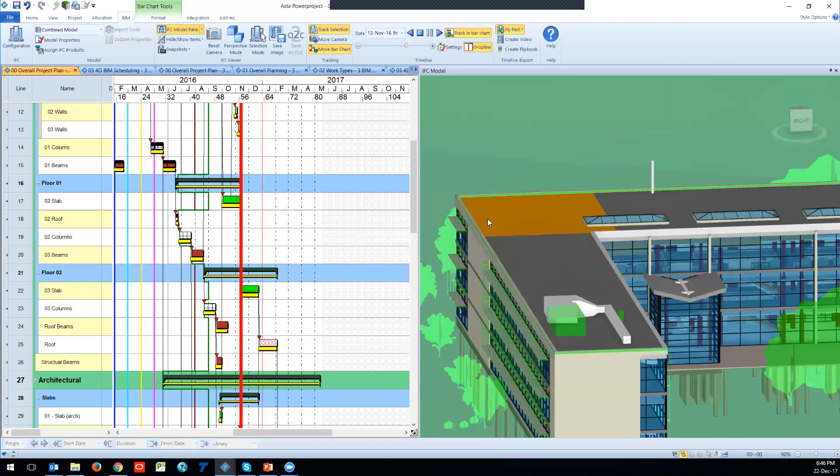Okay, for example, let me also work with the roof. It's more visible in this case. So I can split the roof. Okay, so now I have split the roof. I can set up the building order. For example, I can select the three of them and set up the building order: identical building order or sequential building order. So I can select the sequential building order, and if it is assigned as one task, it will go by the sequence. Also, there is a possibility to split products manually.

So you are able to split the product in different ways, however you would like to split, and you can save it, and you'll be able to see the different split products. Okay. Do we have any other questions?

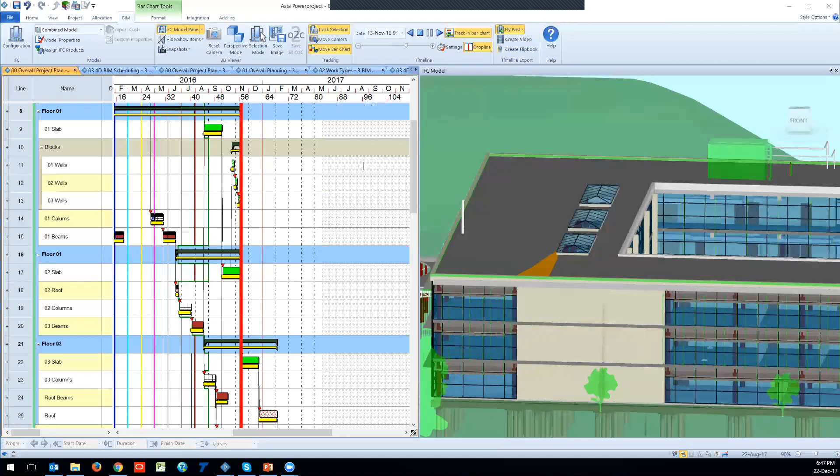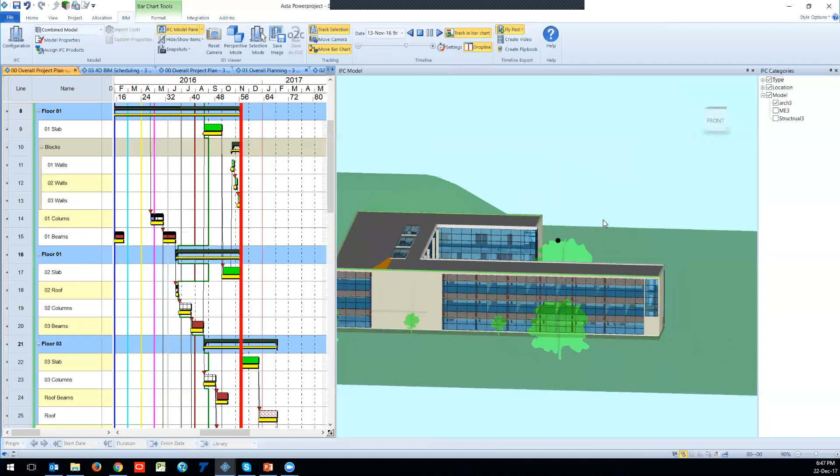Okay, very good question we received. It's about the federated model, or if you have multiple models, or if you are receiving the models from different entities. Yes, you can do this. For example, this project has different models inside, so it is a grouped model. We have the structural model, the mechanical and electrical model, and the architectural model. So these three models are combined together. How we actually do this is with separate files. In the configuration part, we upload each model separately, and then we create a group of the models. We can color override it.

So in this case, let me go to the properties of these three models. You can see we have the three models combined together in one part. We are able to change the site color. So these are the basics. There's the ability to add site objects, for example, the crane, the scaffolding. You can also add site objects as well, so no problem with it. You can add them as you wish. Okay. Any other questions?